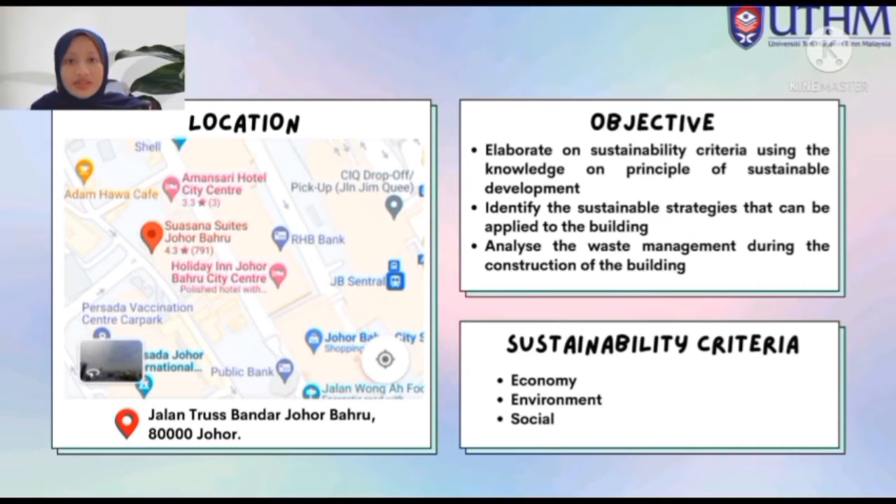The sustainable criteria must be based on sustainable construction. There are 3 pillars, which are economy, environment, and social. There are a few strategies that can be applied to achieve the sustainability of the building.

The first strategy is energy efficiency. Energy efficiency is defined as the use of the most cost-effective way of energy. For minimum EE performance, consumption can be cut back through improving efficiency by using smart meters, which can track where and how the energy is used in this building.

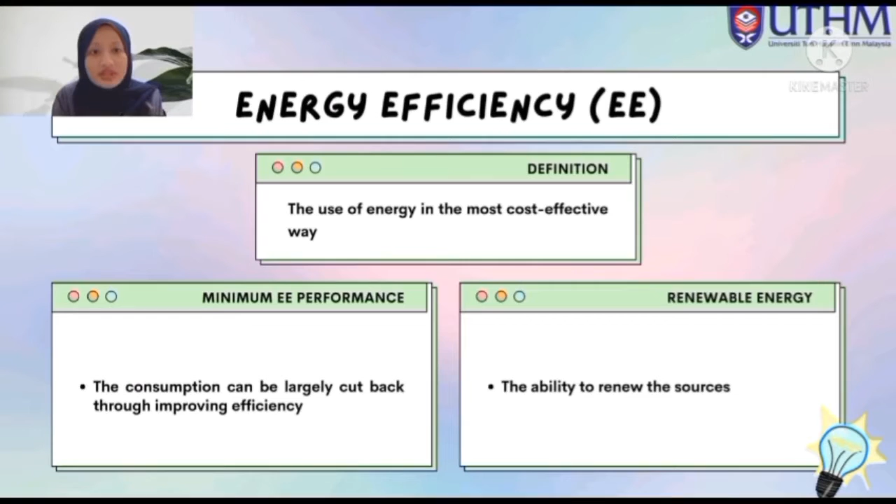Renewable energy is the ability to renew natural resources. The amount of energy used for heating and cooling can be reduced by using ventilation, heat sinks, and better insulation. For example, heat pumps and heat exchangers can transfer heat from the IT server room to the building to heat the water.

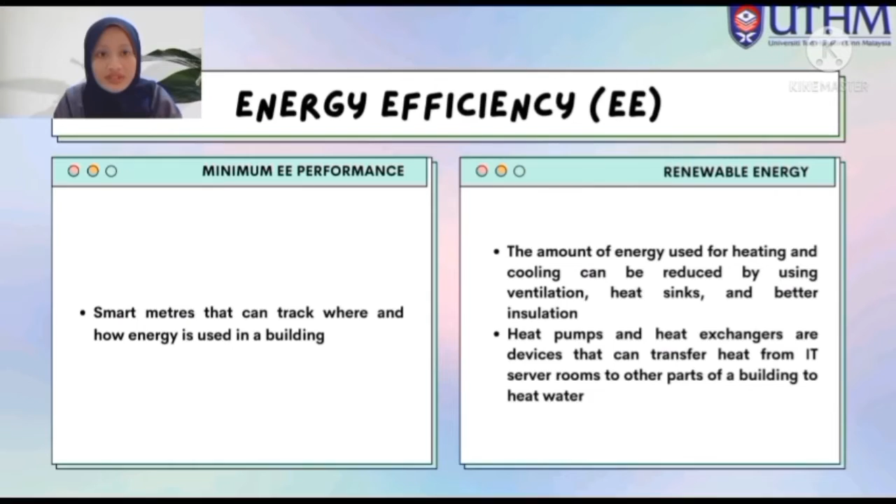For the minimum indoor environmental quality performance, Aura Residence has been designed with natural cross ventilation and added a chimney effect to give better airflow quality inside the building. For sound insulation, Aura Residence will be designed with specific instruments to reduce sound penetration between dwellings, for upper floor and wall. The upper floor will be designed with a metal resilient channel isolator, and the floor will be designed with semi-rigid mineral wool insulation.

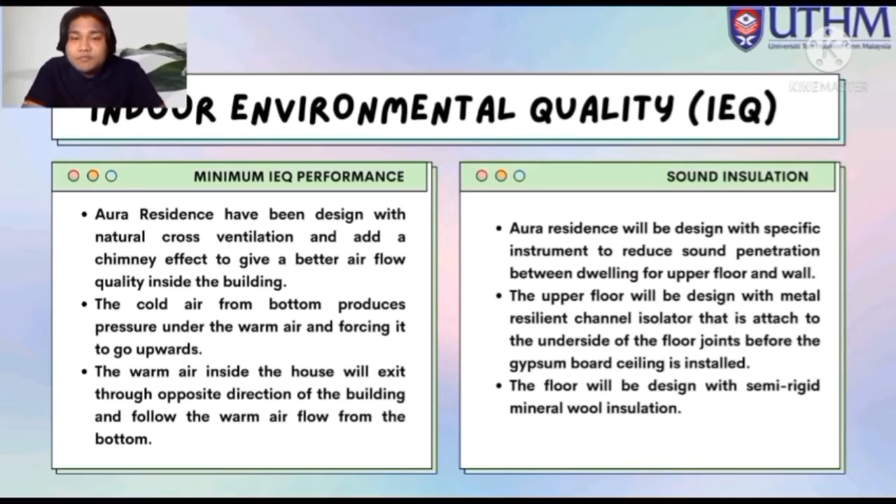Next is public transport access. The location selected for Aura Residence is very strategic because it is near Johor Bahru Sentral, which is the largest mass transport hub in Johor Bahru. The distance between Aura Residence and Johor Bahru Sentral is only 230 meters away, and the pathway will be covered for handicap access.

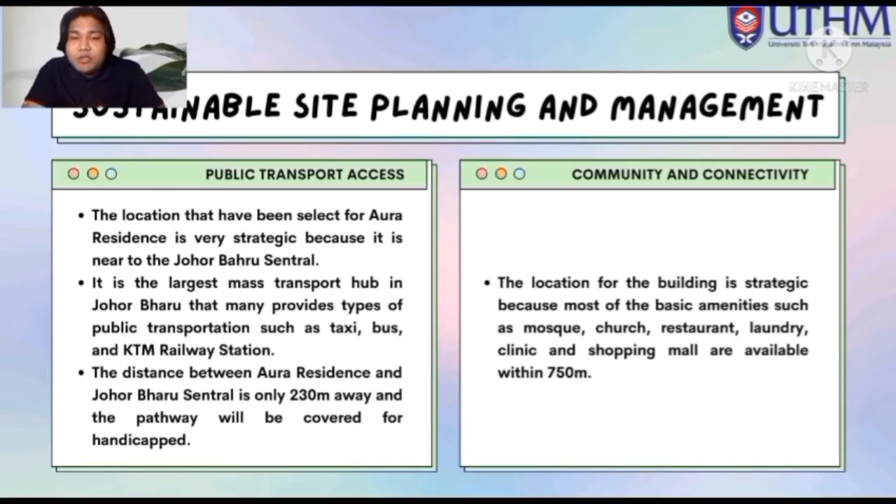And the last one is community and connectivity. The location for the building is very strategic because most basic amenities such as mosque, church, restaurant, laundry, clinic and shopping mall are available within 750 meters.

Hi, I'm Bisna. Criteria for materials and resources: materials are the essential components of building construction, and this criteria is divided into 2 main assessments, which are reused and recycled materials, and sustainable resources.

Reuse and recycle is an important strategy to reduce the environmental effect of buildings. Reuse means materials that are kept out of the disposal stream and landfills, and it helps minimize pollution and limit the use of natural resources. Recycle means maintaining materials by collecting, sorting, processing, and turning them into new products.

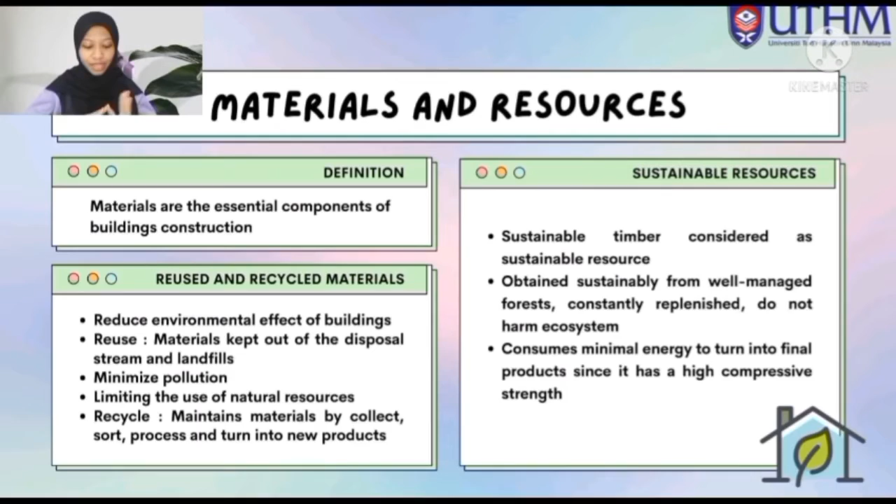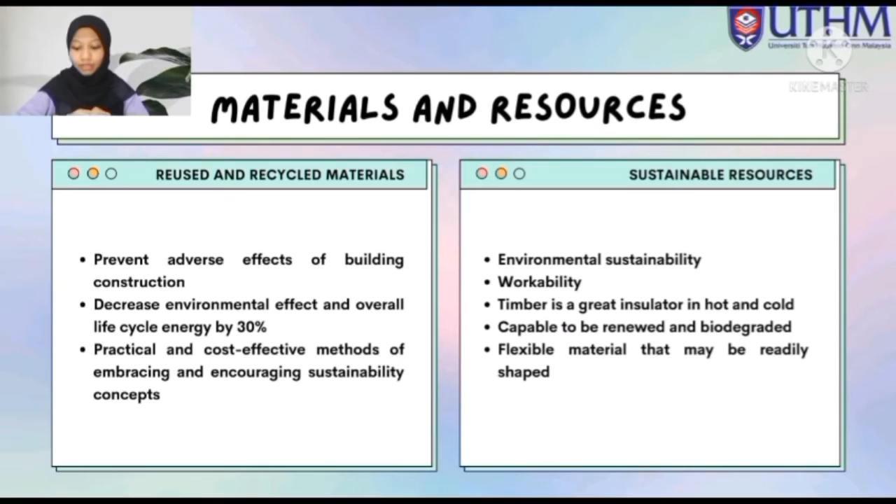Sustainable timber is considered a sustainable resource, obtained sustainably from well-managed forests. Reused and recycled materials can prevent adverse effects of building construction, decreasing environmental effect and overall life cycle energy by 30%. For sustainable resources, timber is an insulator in hot and cold weather, capable of being renewed and biodegraded, since it has a flexible material that may be readily shaped.

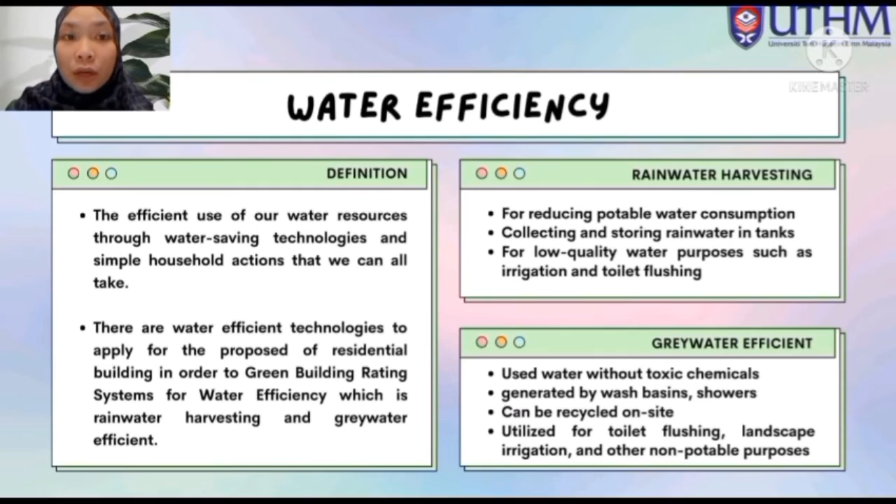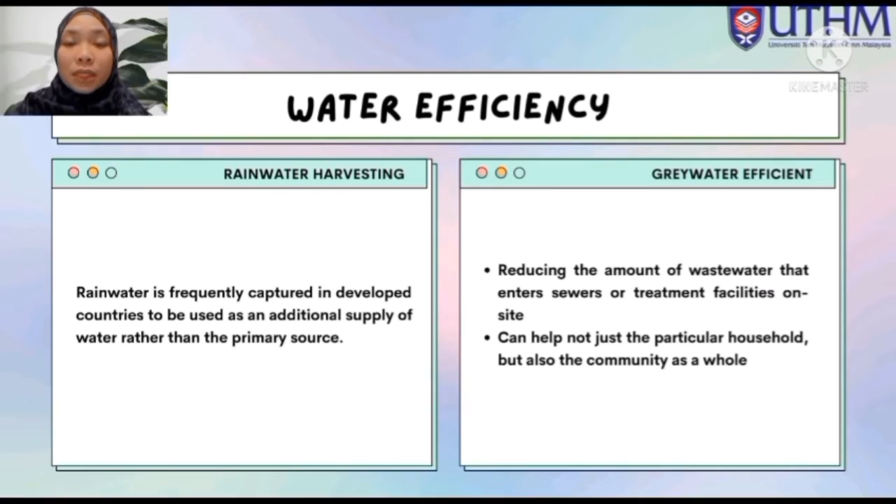For grey water efficiency, this is used water without toxic chemicals, also described as wastewater generated by wash basins, showers and baths, that can be recycled on site and subsequently utilized for toilet flushing, landscape irrigation and non-potable purposes, reducing the amount of wastewater that enters sewer or treatment facilities on site. This can help not just a particular household but also the community as a whole.

My name is Hana Shaira, and I will explain about innovation. Innovation is known as new ideas, devices or processes, as well as inventive design and effort that support the GBI's goals. Each green construction project has a different innovation criterion.

These criteria are divided into 2 main assessments, which are Innovation in Design and Environmental Design Initiative, and Green Building Index Facilitator (GBIF). The first one is Innovation in Design and Environmental Design Initiative.

There is a latest list of approved innovations. For example, energy efficient appliances, which provide at least 2 types of 5-star energy efficient appliances for all resident units, and the parking guidance system, which allows for unallocated parking spaces.

The second one is the Green Building Index Facilitator (GBIF). GBI facilitators give professional service to assist in the design of a project in order to attain the required green rating. The GBI professional costs are not fixed, and will solely depend on the preference of the GBIF.

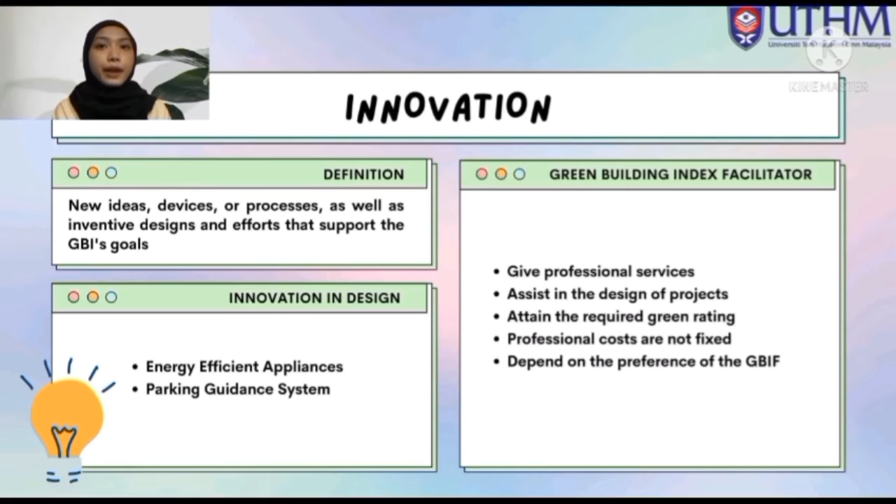The use of energy efficient appliances was chosen for the residential building, as our residential building is equipped with modern technology. Residential buildings consume 25% more electrical energy than commercial buildings. The benefit of using 5-star technology equipment is it can reduce the cost of electrical energy in one residence.

For the parking guidance system, it is a device or a type of software. The main goal is to guide people with their parking routine and save their time.

For the Green Building Index Facilitator (GBIF), it's required that at least one significant member in the project serve as a GBI facilitator, to help with design integration with GBI requirements and manage the application and certification process until the Green Building Index certification is attained.

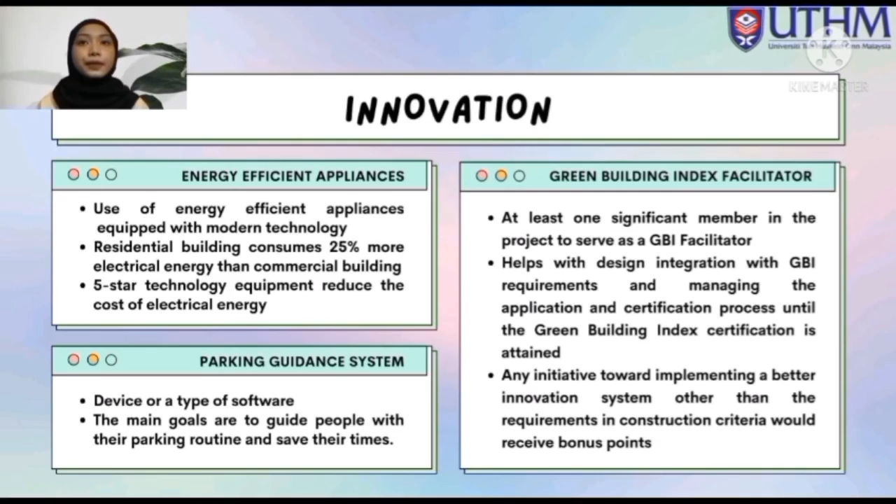Next I will explain about waste management. A waste hierarchy is often regarded as the finest waste management strategy because it benefits the economy and has a minimal environmental impact.

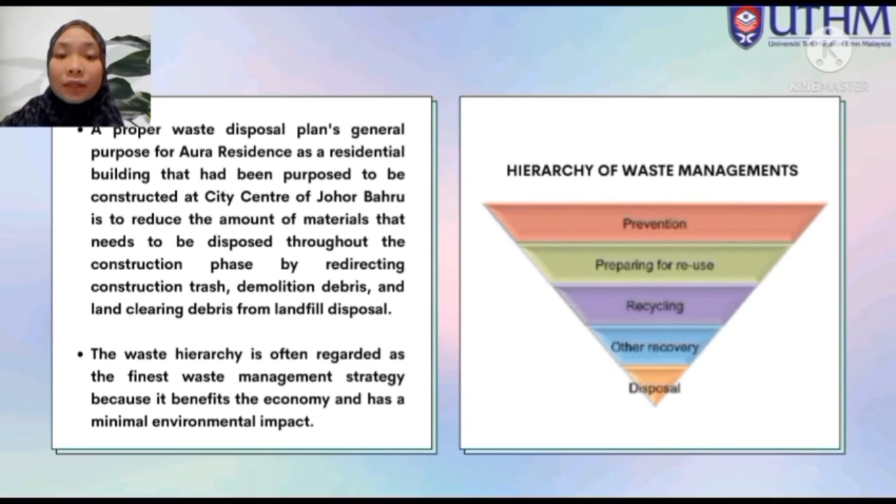So first we start with prevention. Second is preparing for reuse, the third one is recycle, the fourth is recovery, and the last one is disposal. For the conclusion, green construction benefits can be divided into 3 categories, which are economy, environmental, and social.

Green construction benefits have been proved to provide beneficial social implications in addition to economic and environmental benefits. So that's all, thank you.